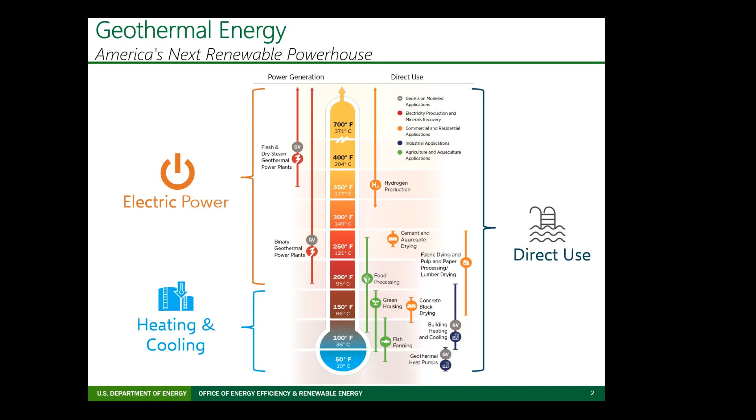And then, in the direct use span, there are a massive amount of opportunities that are being taken advantage of in Europe for greenhouse warming, for aquaculture. People are brewing beer and distilling. There's even the opportunity for hydrogen production, which is starting up in New Zealand right now. And then, of course, at the other end of the spectrum, the higher temperature range, well, actually between 150 and 700 Fahrenheit, we can generate flexible baseload electric power, which is really important.

So obviously, lots of attributes for geothermal, and the fact that basically, wherever you go, and the deeper you drill, there's heat, potentially stranded heat. Geothermal is ubiquitous, and so that, along with the fact that it's clean, that it's reliable, that it can be used across industrial, commercial, residential sectors for different solutions, makes it, I think, a really powerful and really exciting opportunity for the U.S. going forward.

So, as I said, it's baseload energy, but something that's unique about geothermal is that it's flexible, and therefore it can help us stabilize the grid. And I'm going to talk about this a little bit later. It creates jobs. It can provide resilient power and cooling and heating solutions in a variety of geographies. So we can work in urban centers. You see this internationally. Many cities have heating and cooling from geothermal in Paris and in Reykjavik. But we can also work in remote communities with small modular units for power production or for direct use, as well as other rural areas.

Also, there's a really interesting and unique opportunity that I'll just touch on briefly, the opportunity to use geothermal as a domestic source of critical materials. And so that is a tremendous need in the United States right now, and can provide an economic benefit and reduce some of the costs with geothermal development, which are at this point one of the limiting factors for development. So I'll talk about these things in a little more detail in the next couple of slides.

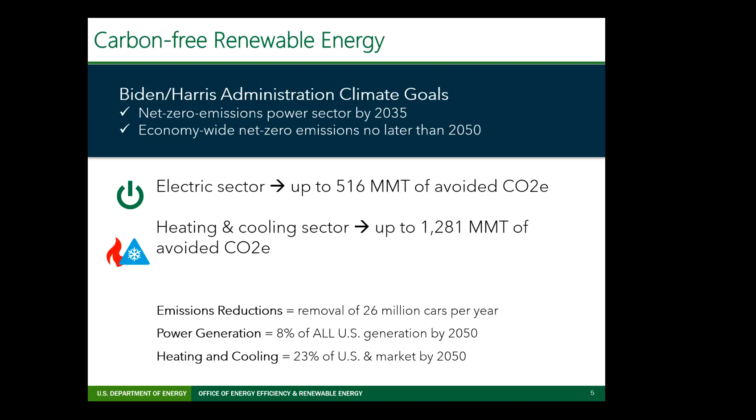And so this is really exciting because of not only the contributions that we can make, but the tremendous amount of avoided CO2 that could come from those developments. So the equivalent of around 26 million cars removed from the road on an annual basis until 2050 from those numbers. So in addition to being carbon-free, there are some other unique characteristics of geothermal that I'll go through pretty fast.

And I keep coming back to this term of flexible to describe geothermal, baseload and flexible. And what that means is that our utilities can benefit from the grid services that we can offer, meaning we can operate in a load following mode in addition to providing this baseload power that's available even when the sun might not be shining. And utilities, especially in states where there's a glut of other renewables, need generation sources that can balance these daily and seasonal loads in generation. And so our operational flexibility means that we can provide a higher value than some other technologies per megawatt.

So you might hear that geothermal has a higher LCOE than other technologies. That's true, but it's not necessarily taking into account the fact that there are other significant benefits. This is namely one of them. So some recent analysis that was done showed that in California, geothermal generation is actually worth $32 more a megawatt hour than generation from solar on a combined energy and capacity basis. So that's a really big deal.

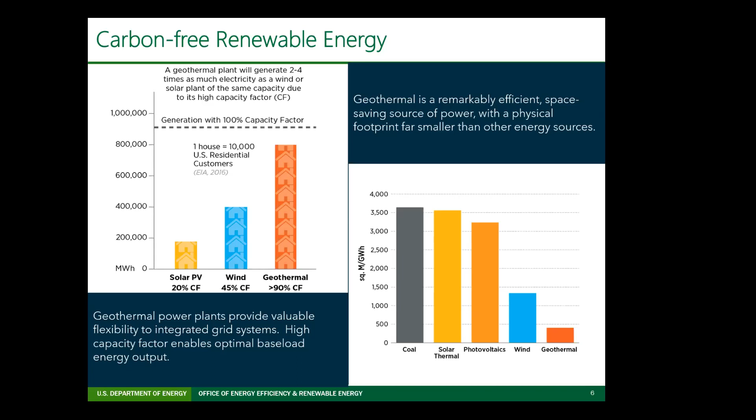And I think as we see more RPSs in states, we'll see more folks taking into account the benefits that geothermal does provide. Then on the right side of this slide, just to touch on really quickly, a small, less land area and space compared to other renewables, which is also important when we're thinking about limited space in the U.S. for power generation. Jobs also.

So geothermal, our analysis shows from this GeoVision report that I'll provide the link for at the end, if we advance our technology such that deployment can grow, and we can see significant new installed capacity on the order of what I mentioned, the 60 gigawatts by 2050, or 8% or so of U.S. generation, we could see on the order of 300,000 new jobs. And these are mostly jobs in the operation and maintenance positions related to exploration, deployment, and

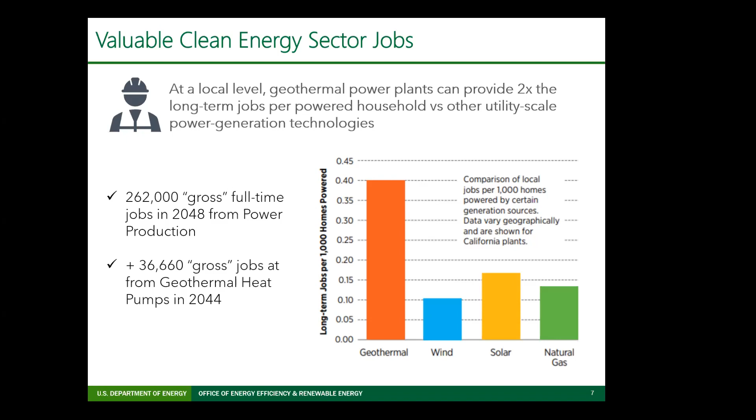on-site work. So kind of following in really nicely into this space, those expertise also just happen to be the same expertise and the core competencies of the oil and gas industry. And so we are a very small industry at this time. Our market cap is significantly smaller in geothermal than the $1 trillion hydrocarbon industry.

So we can't necessarily absorb all of the jobs and all of the workers that are being displaced right now by the downturn, but the skill sets are directly transferable, and we're very eager to help transition folks that have these really specialized skills in exploration and drilling, in geoscience and engineering, into this clean energy industry where we really need more folks as we expand.

So the last piece, just to kind of cover the exciting benefits of geothermal that you might not have known about, is the opportunity for critical materials. We are not normally considered a player in the world's lithium market. Most of our lithium comes from Argentina, Chile, Bolivia, but the United States Geological Survey has indicated that there are quite a bit of critical metals out in the Western US, and especially the Salton Sea is one area of significant focus right now, a shallow lake that's in Southern California.

Some research shows that there could be up to 40% of the global lithium supply possibly extracted from geothermal brines in this area. And so not only would that be tremendous for the US controlling this very strategic market and for our battery supply chains, but this is also really important to help offset some of the costs of geothermal power plants and development, making it more economic and more attractive for developers.

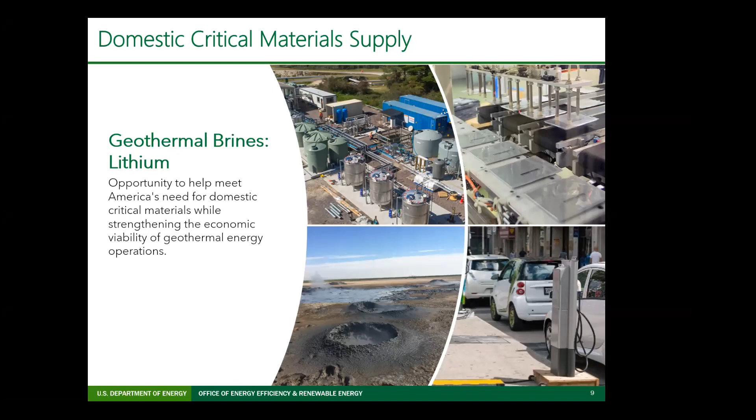So not to say that we can do this everywhere, but there are some areas where there's tremendous opportunity in the US for extraction of critical materials. So just to put some things in context, you have a sense for the benefits of geothermal, and then I just wanted to really quickly go through where the domestic and the international community sit.

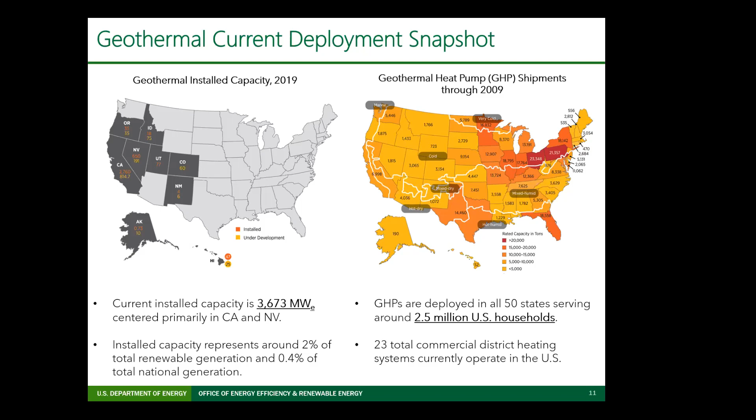The data is a little old there, but there's around 2.5 million heat pumps installed in the US currently, and not pictured there on the slide, around 23 district heating systems in the United States that date back to 1892 in Boise, Idaho, where the first one was installed. So that's kind of the overview of where we are internationally and domestically. And now I'll move on to what we do in DOE.

The Geothermal Technologies Office is the largest funder of geothermal research in the United States, of course, and potentially in the world. But our priority is innovative technologies that are going to move the needle on geothermal on both the power side and the heating and cooling side. And so we have three major priorities, focused on, number one, getting power online fast. We want to get to 60 gigawatts or more, and we want to do it quickly.

And we're doing this by working to resolve the technical and non-technical challenges that are limiting deployment. So this is accessing the massive EGS resources that exist, and the hidden hydrothermal resources that the USGS says exist in the Western US. The second priority is decarbonizing heating and cooling loads by using direct use and heat pumps. I work on the power side, but it's absolutely fascinating for me to hear that space heating and water heating in the US is 2/3 of residential energy use, and most of that comes from natural gas.

So the opportunity here to reduce emissions by offsetting the use of natural gas, the use of hydrocarbons in general, and the added benefit of providing more resilient heating and cooling in, as I mentioned earlier, rural and urban environments is really exciting and tremendous. And this is happening globally. Europeans are super focused on heating and cooling using renewables, especially geothermal, for the reduction of hydrocarbon use and CO2 emissions. So this is a really important space.

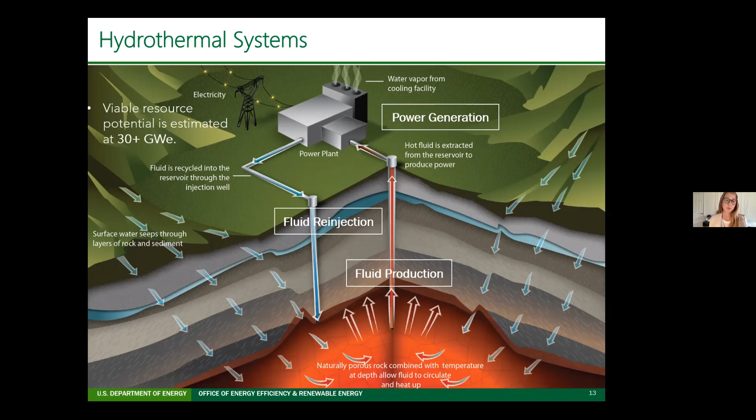Just a quick reminder for those of you who might not know hydrothermal systems. Here we are looking at a really generalized diagram of a hydrothermal system. Often we think of hydrothermal systems present where we see hot springs and geysers at the surface. We know that there's fluid, permeability, and heat bringing that fluid up to the surface where we can see these superficial features. But we also know that there's 30 gigawatts of hydrothermal resources that don't have any surface expression. Our hydrothermal program is focused on new methods to help us find those hidden resources and reduce the exploration risk of accessing them.

So when we think about how can we take less time to drill a well, or how can we reduce the material costs of any well, that makes a significant impact and lowers costs of the development significantly. So we're looking at this from an engineering side, from an efficiency side, using methodologies that we're translating from oil and gas. John McLennan is leading this space in our FORGE project, where we are seeing absolutely tremendous advances that are really exciting. But we're also looking at it from a data perspective.

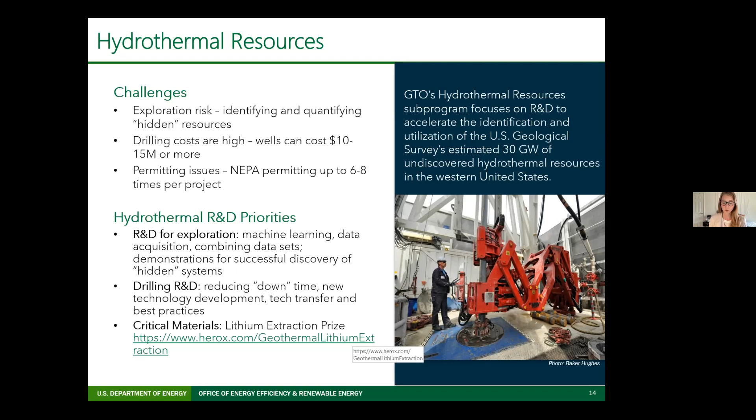So, on to EGS. This is my subprogram, so I'll talk about it in a little bit more detail. But these are conventional systems. As you could see when we looked at that map of where geothermal development exists today, Western U.S., in an area where the tectonic environment is appropriate, where we have resources that have surface expression or that we've been able to find. But they are limited to specialized areas where all of those three needs are co-located: heat, water, permeability. But as I said earlier, there's heat in the subsurface no matter where you go, as long as you're willing to drill there.

And I like this term of stranded heat because you can think of it like, well, if we can go utilize that heat for something else, we can make power from it. And so if we add water and we reopen existing pathways or make some new ones, and then collect that heated water, we have an EGS system.

And so there's some really interesting numbers in terms of what our resources are. And this is an area that we need to improve on, our resource assessments for EGS in general. But some assessments from the last few years have said that at less than 3 kilometers depth, so in the shallow subsurface, in the lower temperature area, the accessible EGS resource is around 800 million terawatt hours. And then if you look at 3 to 10 kilometers, it's around 3,600 million terawatt hours. And for context, we're talking about 3,800 terawatt hours utilized by the US in general in 2020.

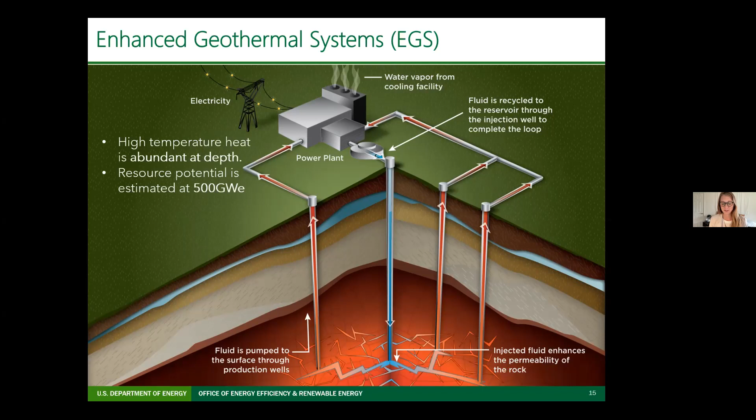So we want to access this massive resource, and we need to and we want to produce this clean energy from it. But in order to do that, we have to resolve some geoscience and engineering challenges, and this is why the ARMA community is so exciting to be partnering with over the last many years, because so many of our challenges are geomechanical challenges.

But basically, if we want to create an EGS reservoir, we need to better understand what the subsurface looks like. So the temperature, the permeability, stress conditions, fracture characteristics, and we need to use that information to create accurate 3D geological and geophysical models. That helps us design simulations, and it helps us track the evolution of reservoirs over time, which is critical for making sure that they're economic.

And as you all know from your fields, some of these things are not measurable. Some of these things are very challenging to measure, stress conditions as an example, or what's happening in a fracture at 12,000 feet below our feet. So my program focuses not only on trying to develop the models, but also developing the technologies and methods that can help us actually get this data from the subsurface, or develop proxies for those things that we can't actually measure. So then the other big critical need and challenge in EGS for it to become a commercial reality is being able to manipulate the subsurface.

And there's obviously so much that we can learn and are learning from the oil and gas industry. But this repeatable control of the subsurface and ability to enhance permeability is critically important. And to do that, again, we need to understand the structural and geomechanical, geochemical environments. And then we have to design engineering solutions that can help us counteract the evolution of permeability when it's going in a non-economic direction. And so we're looking very closely at this, and looking very closely at the limitations of trying to do these things from an engineering perspective at 200+ degrees Celsius, which is always the challenge.

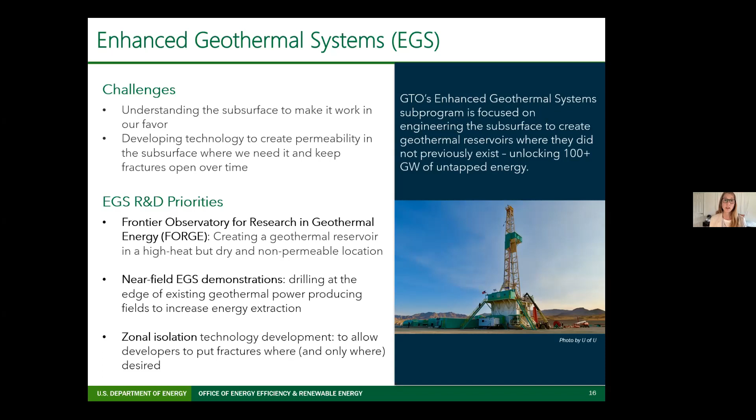And then finally, what I was just alluding to earlier, we're looking at sort of this nearer term EGS, which is operating in the margins of existing hydrothermal fields. And that is meant to show that EGS can work now, that especially if we use existing infrastructure, maybe an idle well or an unproductive well, we can turn it into something valuable by using EGS methods and techniques for stimulation. And we have a number of projects actually that are open in this space right now.

But I want to just go back to Forge for one second to say that this project is extraordinarily important in moving EGS forward. This is an over $200 million effort. It's the largest program that our office has ever funded. And it's focused, as I said, on how to make EGS successful from a reservoir creation and sustainability perspective. But also we are looking at characterizing the Forge site in the most robust way that we can, probably the best characterized geothermal EGS site to date, and then making all that data available to the community.

So just a plug for those of you who might be interested in looking for data sets. There aren't a lot of geothermal data sets that are public, and so a critical aspect of this is to disseminate technical data to the community to help inspire and foster new research on geothermal that might not even be part of our effort. So I'd encourage you to go to the Forge website.

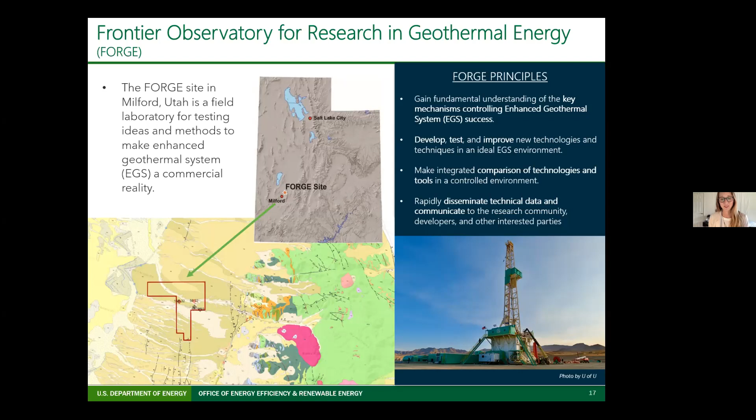It's a really exciting project, and there's so much exciting stuff happening literally as we speak, and for the rest of the year. So quickly, I'll move into the low temperature program and just talk about, basically we're talking about anything that is shallow opportunities for geothermal use. So anything you can do below 200 degrees Fahrenheit.

Heat pumps, as I said before, very low temperature, 40 to 80 degrees. Direct use, we can use direct use in a shallow environment or deeper direct use. This is something we're looking into right now. And then low temperature electric power, where we look at how we can use on the order of 100 degrees or 150 degrees for actual power production.

So USGS has estimated around 46 gigawatts of thermal heat that's available from low temperature resources in the US. And as I mentioned earlier, the opportunities in the direct use and the heat pump space are really tremendous for CO2 reductions and also just for resiliency of our systems.

So in this program, we're looking to not only address the technology challenges that might exist for deep direct use specifically, and for improving efficiency of direct use in general, but we're also really focused, and starting to be even more focused under this administration, on awareness challenges. People don't know what direct use is, they don't know what heat pumps are, and we want to make people aware of the benefits that they provide.

So we're looking at some feasibility studies for direct use. East of the Mississippi, actually, we have a project that's really exciting at Cornell University, and also looking at this other topic for energy storage, which is a really fascinating use, and it's still early stages, but the idea of converting electric energy from power plants and storing it as thermal energy in saline aquifers.

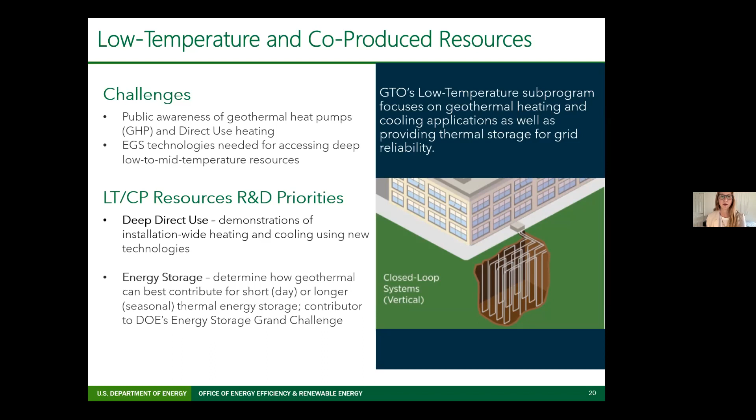So we have some work happening with a couple of different awardees. USGS is working on this, where we are looking at the feasibility of it, looking at what we could do with that stored heat, how you might use it. You basically withdraw it later for direct use applications, or even indirectly for electricity generation.

So finally, the data modeling and analysis subprogram. This is less technical, and I know this audience is more in the technical space. So I'll just say here that what we're looking at is communication of the operational flexibilities, assessment of the environmental and the economic benefits of geothermal in general, and then all of that helps underpin the direction that the technical programs in the office go.

So we use the economic modeling and the environmental modeling. We look at how geothermal will fare amongst our sister renewables and in the general power sector and in the out years with grid models. And then we focus on technology advancements as a result of this analysis in our technical programs to try to meet those needs.

So I want to just close by sharing the potential, which is the most exciting part of the talk. So the potential for both the heat and the power side. I alluded to these at the beginning, but just thinking about heat pumps and the opportunities that they provide for heating and cooling, especially in some really unusual conditions that we're seeing across the U.S. these days, from natural disasters, from the heat dome that happened in the western U.S. just last week or the week before.

So the opportunity here is to increase deployment of geothermal heat pumps from around 2.5 to 28 million, and I already talked about the CO2 emission reductions that could happen just as a result of that. And then district heating systems on the right side of the slide. We only have 23 existing, and we are far behind the international community in this space. And there's a really interesting opportunity to expand, based on our modeling from our GeoVision study, to around 17,500 in the US.

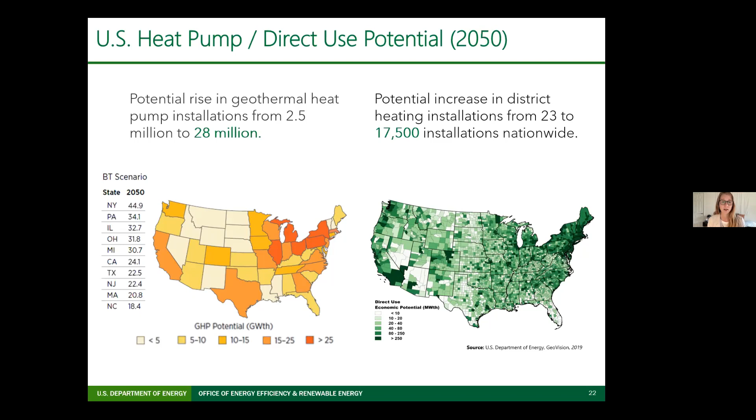But the caveat here, and the note that I want to end on, is that technology innovation is absolutely essential to getting there. And a little bit of policy, but basically we need to better understand our subsurface conditions to reduce our risk. And we need to innovate and develop technologies that are going to help us operate in these challenging conditions more efficiently and in general in order to get there.

So really, really important to keep focusing on technology innovation, and that's what our office will continue to do. And we'd love to have you all be involved in that, and love to hear your thoughts on this. We're very excited to be part of the solution at DOE and to be helping to seed and grow the geothermal industry and drive this innovation to see deployment on these scales.

So I think that's all from me. I have some follow-up slides if people are interested in our budget or in any other aspects, but I think I'll leave it there. Hopefully that's good timing. That's fantastic, Laura. Really outstanding, and very, very exciting presentation. We do have a few questions. Do you want to go to the chat, or do you want me to?

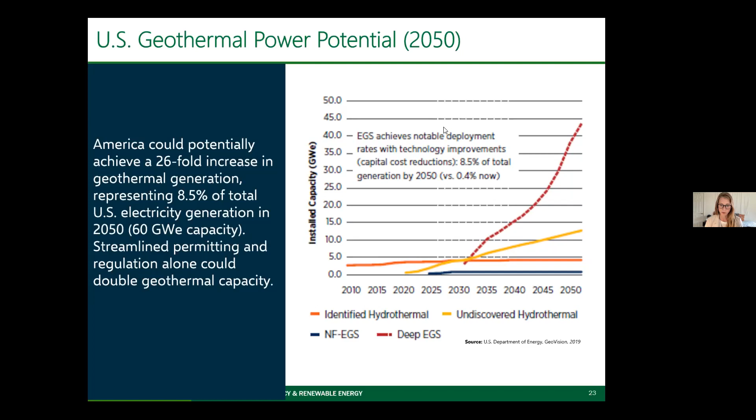Okay, so the next observation and question came from Nico Roussel, and Nico once again appreciated the talk, and his question is about sedimentary geothermal systems similar to the DEEP project in Canada. What's the DOE's position on those? Oh yeah, that's a great question. We're very interested in looking into this space, and one of the slides I brought up with our current open funding opportunities covers this, ReAmplify.

It's not a direct one-to-one oil and gas translation to geothermal, even though we'd be working in much more similar geology than in the EGS space, where we're working in harder rocks and higher temperatures. I think there'll still be interesting new challenges for maintaining flow and permeability, but there's a really exciting opportunity that we're very interested in pursuing, especially for the low temperature power production space,

and the opportunities for direct use, and for the implications that can have on communities where there might be existing wells from previous hydrocarbon activities, or in cases where we would potentially in the future, not under this effort, drill new wells. What could the implications be for communities that are local to it? So I think it's a great and exciting area, and I love what Canada's doing in that space, specifically with community engagement.

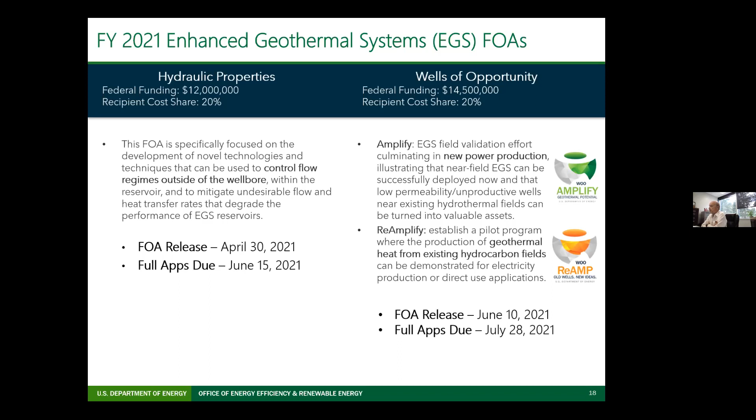James Rogerson found it a very interesting talk, and he appreciates you sharing it. And he's asking if you could point him in a direction where he might be able to find something about the total cost breakdown from exploration to facilities, spud to production and facilities.

Yes, so I would say the best place to go, the most comprehensive documentation that DOE has to date is in the appendices of this report at this link, which I will provide to James afterwards. And so this is our GeoVision, where we assessed all the scenarios of what could happen and what that would look like for deployment out to 2050.

And so there were some very in-depth cost assessments using our economic model to predict or to assess what current costs are and what costs could be based on technology improvements. So you could look at the baseline assumptions for hydrothermal and for EGS, and then what we are hoping that it could get to in this report. If you take a look at the, I forget, I think it's chapter 3, but don't trust me. No, that's cool.

And so Claudius has another question related to induced seismicity, and maybe we'll just forward some links with this presentation that you can provide us, Lauren, to maybe address some of those things. Absolutely, yeah.

And then Lotana, she appreciates your presentation, and she's read a lot about the difference between convective heat transfer in EGS and less efficient conduction in closed loop geothermal. And the question is, is this something DOE considers in these projects, and are there DOE publications on the technical details of closed loop that one can look at?